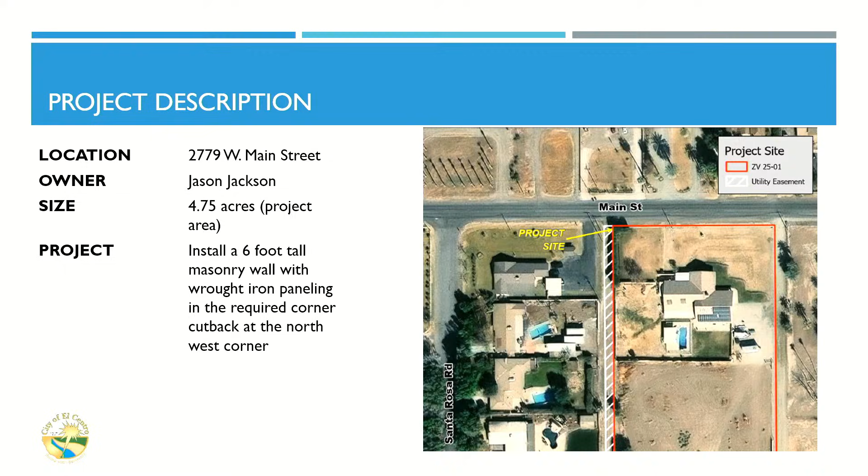Hi, good evening members of the City Council, those in attendance, and members of the public. The item before you is a public hearing to go over zoning variance 2501, applicable to 2779 West Main Street. The project is proposing to install a 6-foot high masonry wall with wrought iron paneling at the northwest corner of the property at 2779 West Main Street. On the screen is an aerial view showing the project site, specifically the corner in question, that northwestern corner where the yellow arrow is pointing. This corner and the western side of the property is adjacent to a utility easement that is accessible to some of the property owners on Santa Rosa Road.

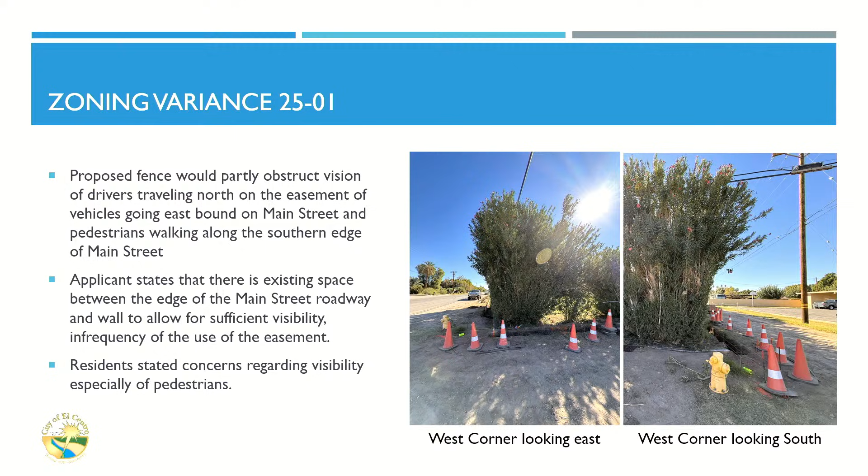We did have some public hearings regarding this project in the last couple of months, and we did have residents up here stating concern regarding visibility for people driving north, especially visibility of pedestrians.

In order to approve a variance, the Planning Commission had to make these findings, which are in our zoning code - essentially the criteria for when a variance is granted, and all of them need to be met. One: because of special circumstances applicable to the subject property, including size, shape, topography, location, or surroundings, strict application of this chapter would deprive the subject property of privileges enjoyed by other properties in the vicinity under the identical zone classification.

The second finding is that any variance granted shall be subject to conditions that will assure the adjustment authorized shall not constitute a grant of special privilege inconsistent with the limitations upon other properties in the vicinity and zone in which the subject property is situated. Third, that granting the variance would not be materially detrimental to public health, safety, convenience, or welfare, or injurious to property and improvements in the same vicinity and zone. And finally, that granting such a variance would not adversely affect the general plan for the city.

We did have a couple of public hearings regarding this project. One was on October 14th. At that hearing, the Plan Commission decided to allow the 6-foot high wall along this section of the property, up to here. That was also the date of a special city council meeting, and due to the amount of time taken by the presentation from staff and the applicant and some of the comments, the Plan Commission decided to postpone the question regarding the corner cutback.

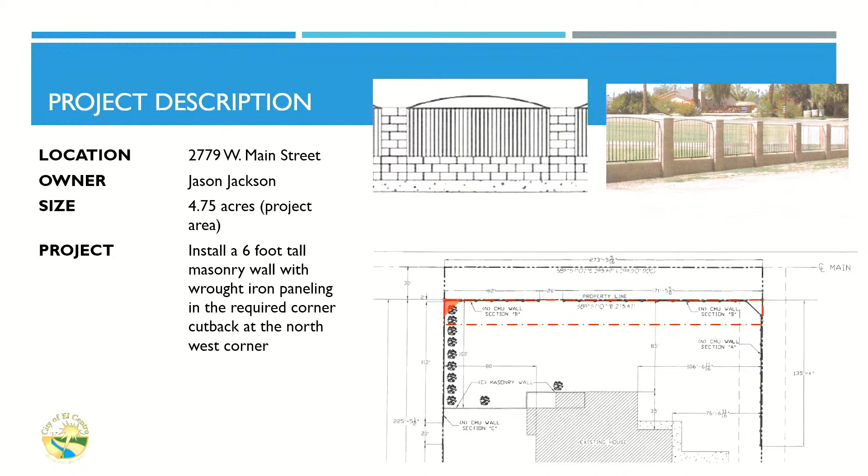That was later brought before a second public hearing on November 17th. At that hearing, we had members of the public express concerns regarding allowing the wall to be built up to the property line. At the last city council meeting, it was voted to reconsider this variance, and we have public hearings scheduled for today. We sent out notices to the property owners in the area, as we did with other public hearings, and also published it in the Imperial Valley Press. As of this time, staff has not received any comments or questions regarding this project for this public hearing.

So the options that are available, council, are to uphold the decision of Planning Commission. If that were the case, the applicant would continue to build the wall along Main Street, and he would have to build that corner cutback, that triangular cutout, as I showed you in previous slides.

The second option available, council, is to modify the decision of the Planning Commission to grant the variance, essentially. Staff recommends that the City Council open the public hearing, and after allowing input, vote to uphold the decision of the Planning Commission. That concludes my presentation. I can answer any questions, and the applicant is also here in attendance to answer any questions.

Thank you. I now open the public hearing. If there's anyone wishing to speak on this item, I do have blue slips. Raul Zamaria.

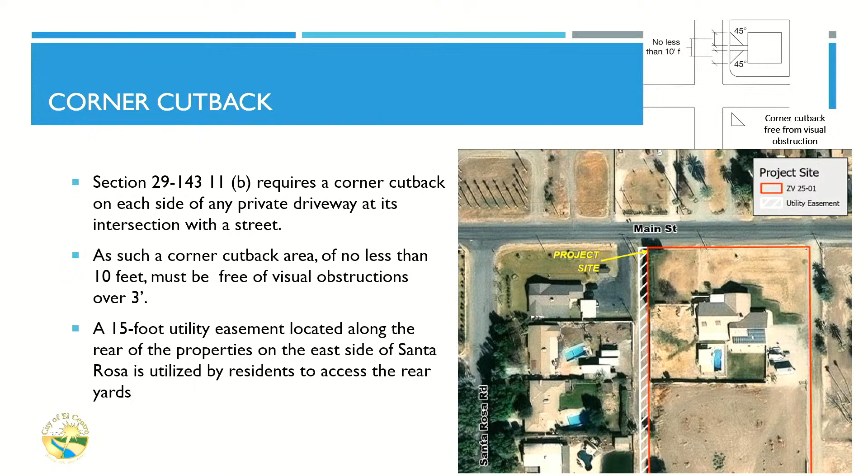When you're driving out of an alley in the city of El Centro, there are 5-foot fences that you can't see across until you get past the fence to the sidewalk or whatever, and at an intersection that's not allowed. So I would see this as the same situation. It's referred to as an alley, it's really a utilities road, but it's used as an alley.

And it's 15 feet, Jason, from that marker you showed us on the ground. Yes. That's the front of your fence, that's the property line? Yes, okay, that's the line.

And from that marker, it's 15 feet to the shoulder? To the shoulder line, yes. It's 12 feet to the beginning of the pavement, and then 3 feet of pavement, that's the shoulder. So when you're driving down a road, the white line on the right-hand side is called the shoulder line. Yes, that's the extra 3 feet, so 12 feet to the pavement and 15 to the shoulder.

Got it. So there's 15 feet total between my property line and the shoulder line. Plenty of room to drive your car almost all the way out, past everything, just like an alley.

I agree. And something Mr. Campos said, for consistency, the utility easement behind Sunset is the same—it doesn't have a 45-degree cutout on either side, just straight this way. Yeah, exactly, I caught that, just like a lot of the rest of El Centro.

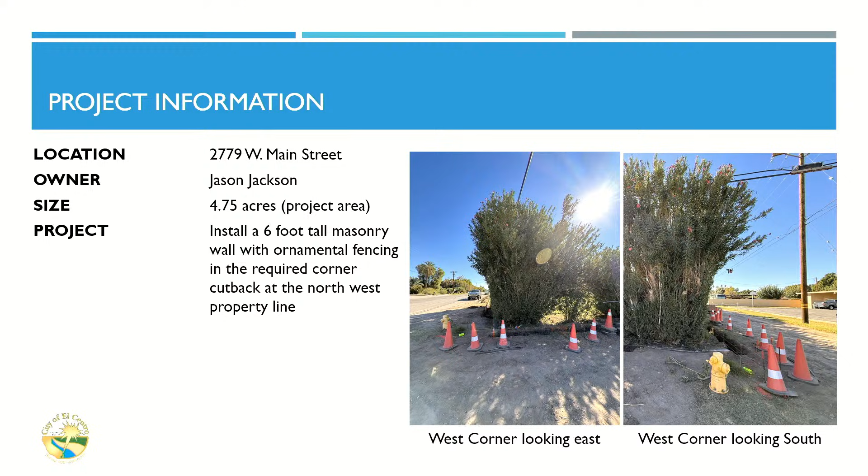But I would ask, Jason, I know shade is a premium, but this is way out by the highway. Would you be averse to taking out 45 degrees worth of oleanders there so there's a visual at least?

I'm sorry, say that again? If there was no cutout, a 45-degree cutout from your fence, but inside your fence, would you be amenable to cutting out 45 degrees of the oleanders there to have a visual across there?

Well, the wall along the alley is a solid wall. Oh, the alley wall in the front is the 6-foot one that has the panel. So it wouldn't really matter.

I get it, thank you. Mayor, I have a couple questions, if I may. Yes, please.

For this body to look at a commission ruling, that's our expectation. I never want to just set that ruling aside on one side of the story, so I read the resolutions for both, and I was taken that the language used to approve the variance is almost the same language used to disapprove this part of it. So then I started wondering about the variance itself.

I know we're a little hung up on the words utility easement versus alley, so I looked at 29-143, was it specific to easements or didn't really speak to it in general? Yeah, it's specifically to private driveways. So, as mentioned, I do live in that area.

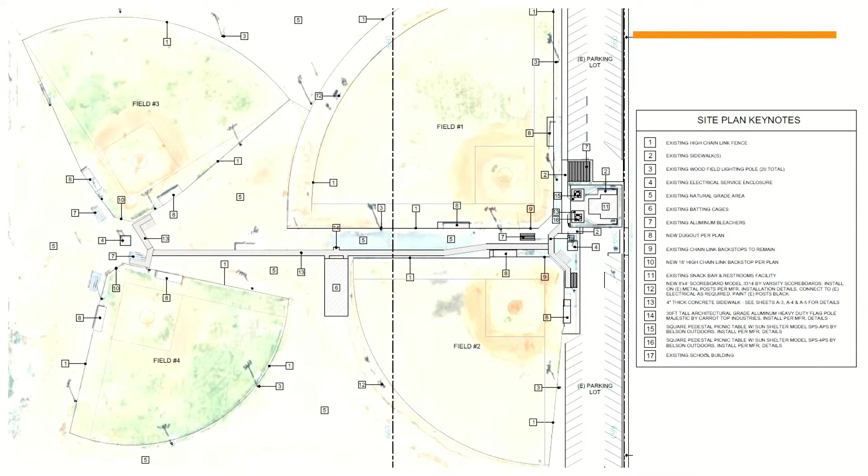You'll see as I go through it that some of the benches we had spec'd out didn't have backing—backing is part of ADA requirements for the dugouts. And then the other element we had included, the dugout space didn't have additional concrete area for a person in a wheelchair.

That's known as a companion seat, so that's additional concrete space added for each of the dugouts proposed, and we have 8 dugouts. In addition to that, electrical work was needed for the lighting and outlets for the new batting cages, which is something we missed on our end.

So the cost of the change order, as mentioned by Mayor, is $93,000. Our contingency included in the resolution was $40,000, so it exceeds what our city manager can approve. Now in terms of budget, even with the approval, if this change order were approved, the project would still remain within budget.

We had allocated $567,576, a combination of Measure P and CDBG. The original contract amount with Shipley was $375,000. The change order was $93,000 and change, so the total project cost is $468,851.69. We still have a remaining budget of $98,724.31. So we are still within budget, with a remaining balance even with the proposed change order.

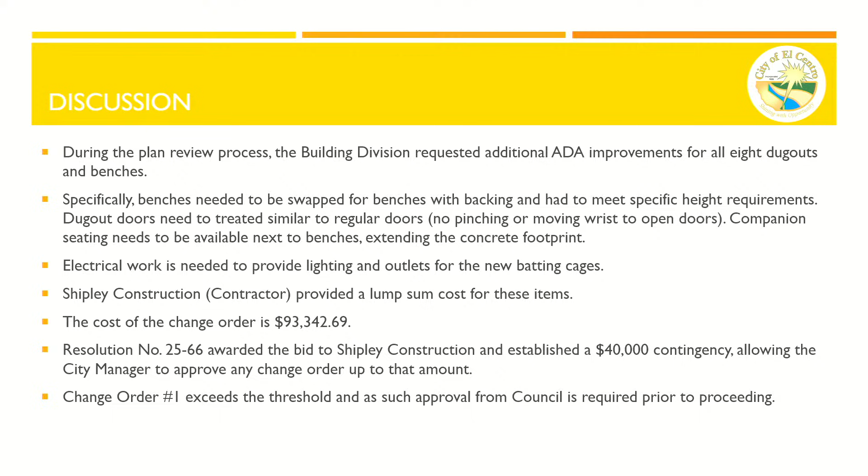May I have a motion and a second? I make a motion to approve as written. I'll second.

Thank you. Thank you.

Now we move on to the bus shelter design update. This presentation is by Abraham Campos, our Public Work Director, City Engineer.

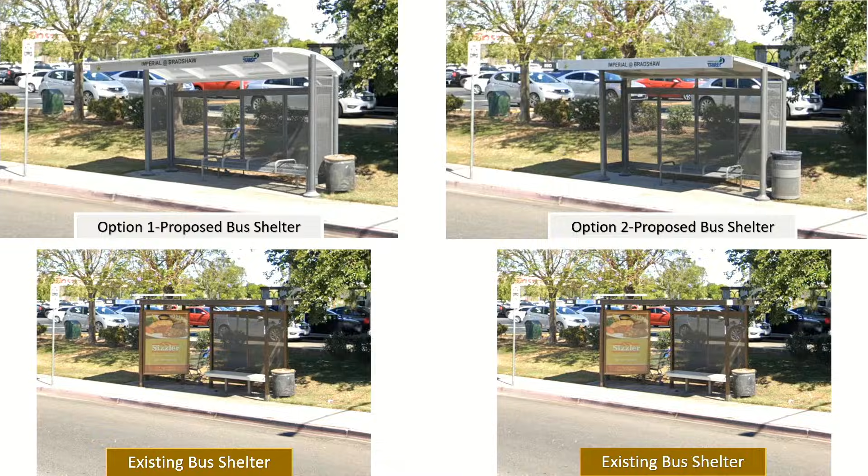Is option one, are the trash cans mounted on that one as well? Yes, the AI did not do a good job. Okay, but this is how it actually looks from the manufacturer.

So is the only difference between 1 and 2 the shape of the shade cover? Mainly, option one's shade is slightly higher. It's also slightly larger, about 6 inches wider. The one on the right is about 5 feet 8 inches or so. The one on the left is 6 feet wide.

The height between the higher portion on option one to the ground clearance, between the roof and the floor, is about 8 feet. The one on the right is a little bit less, maybe 7.5 or something like that. But in general, the main difference is the curve.

Another element that was discussed is providing an opening. It adds to the slick look of it. Also, it allows more airflow in the shelter.

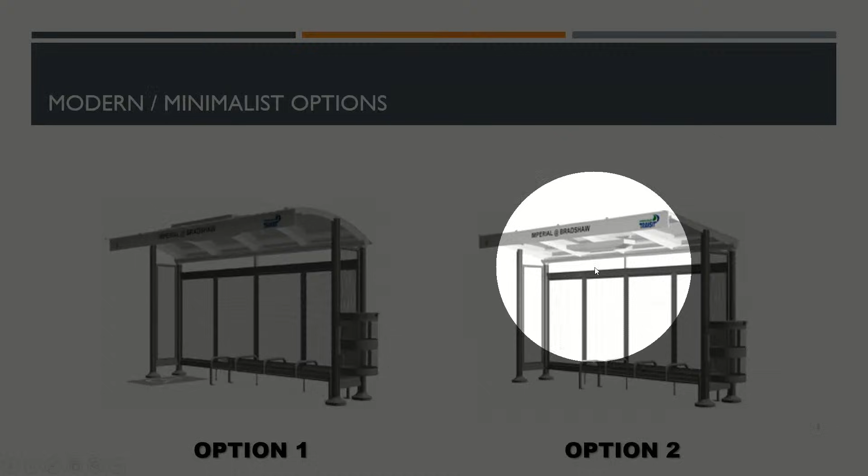Abraham, one of the suggestions given was to have an area where we could put the schedule or a QR code where the more savvy ones can scan it. Is that something we're missing, or can we still add it? It can totally be installed still. This is very preliminary, so what we're thinking about is maybe in this back panel I'm pointing at, it would look like a poster board with plexiglass where you can add a schedule. It could be mounted anywhere. That's a very easy add-on, it just wasn't provided by the manufacturer in this rendering because of the time crunch, but it would be added.

These coverings, the curved covering, option one, is that like the ones at the hospital and others we have around that are plastic and transparent? No, this would be a solid surface, steel. Some of these plastic ones we have are starting to rot and fall apart, have little holes in them and such. Yes, it would be a solid surface. The intent is to be painted white on top to reflect.

The width of these you're showing us, are these comparable to what we have already, or are they wider? They're about the same. They'll look wider because they don't have the triangle advertisement portion. That in itself will gain you more space, but overall they're comparable.

Any other questions, colleagues? Just to go back, the bench style, we could still look at an actual bench. I know Adriana touched on ADA benches. I know it's a whole different project for the dugout, but we'd also like to take that into consideration for our elderly and disabled population, so they can have something to lean on, because sometimes the space between the bench and the back would make them go back a lot.

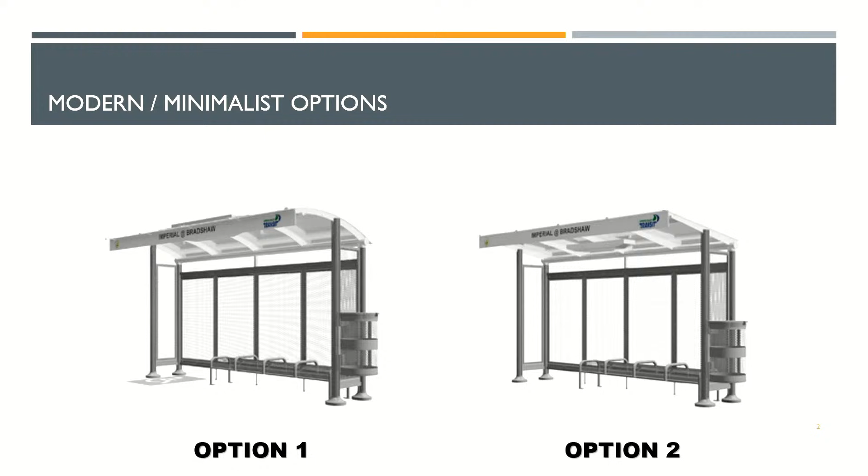At this time we gotta give direction to staff, so I give a motion for option one. Can I have a second? If not, if somebody has something else. I'll second that.